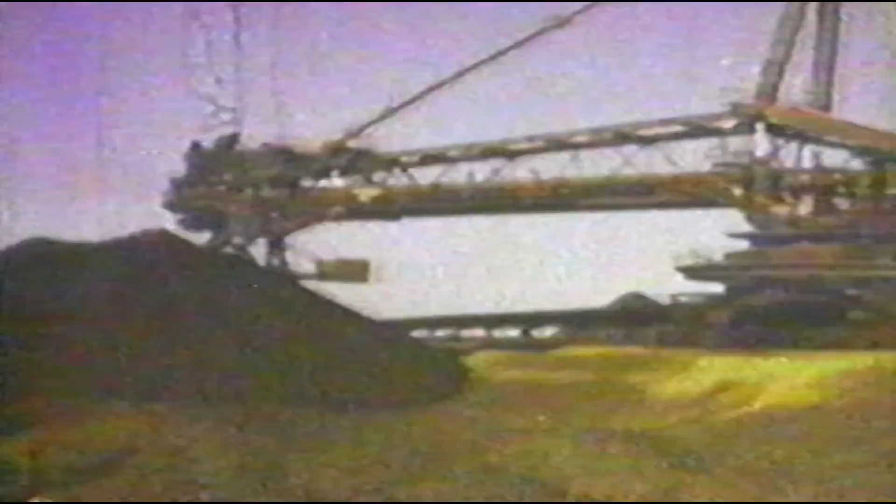Because of energy shortages, transportation and scheduling problems, the stockpiling of larger quantities of materials is needed. If you have a big job to do, this is the machine that can do it.

The Fairfield Engineering Company has a working agreement with MAN Corporation of New York and Nuremberg, Germany, to provide the best answer to the growing materials handling problem. In the next few minutes, we'd like to show you this machine and what it can do for you. It can do a better job of moving materials in large volume and with higher reliability than any other equipment on the market. And here's why.

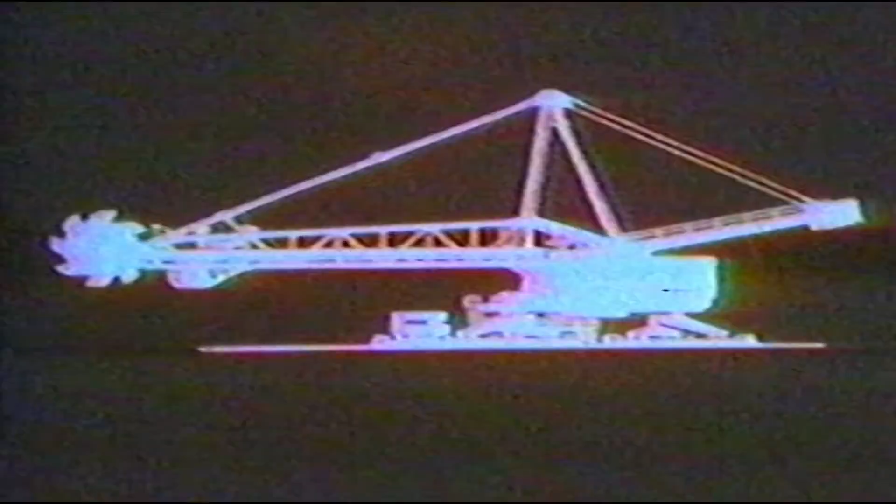It is built better from the ground up because it was designed with these three major design considerations in mind: lower wheel loading, higher machine efficiency, better bucket wheel design. We want to familiarize you with this machine to show you why these design considerations are so important.

The entire machine is supported by bogie wheel assemblies. The exact size and number of these wheels is determined by the load to be carried. Next, the equalizers have been built up to support the gantry. You can see one leg of the three legs of the structure here. This top view shows that the gantry forms the base for the slew bearing. This bearing allows the entire upper structure of the machine to rotate. The rotate platform is above the slew bearing and supports the main mast,

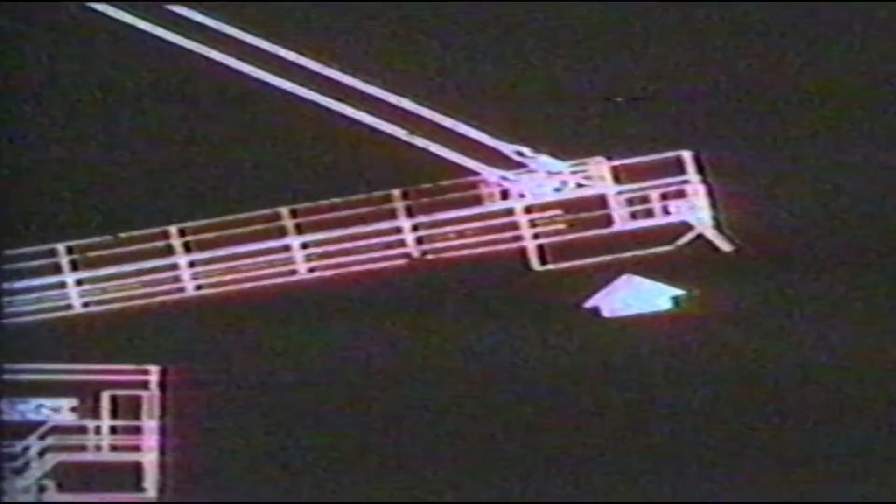tie rods, ballast boom, ballast box, stacker boom, operator's cab, and bucket wheel. The stacker boom houses the boom belt, leading from the bucket wheel to the central chute, which feeds the material to the impact table and onto the yard conveyor. These are the main structures of the machine.

Now that you've seen the parts, we want to show you how they go together and why they form a machine of superior quality. Let's begin again at the supporting wheels, the bogie wheel assemblies. The size of these assemblies is large enough to meet the load requirements of the machine, yet no single wheel has to support more than 48,000 pounds.

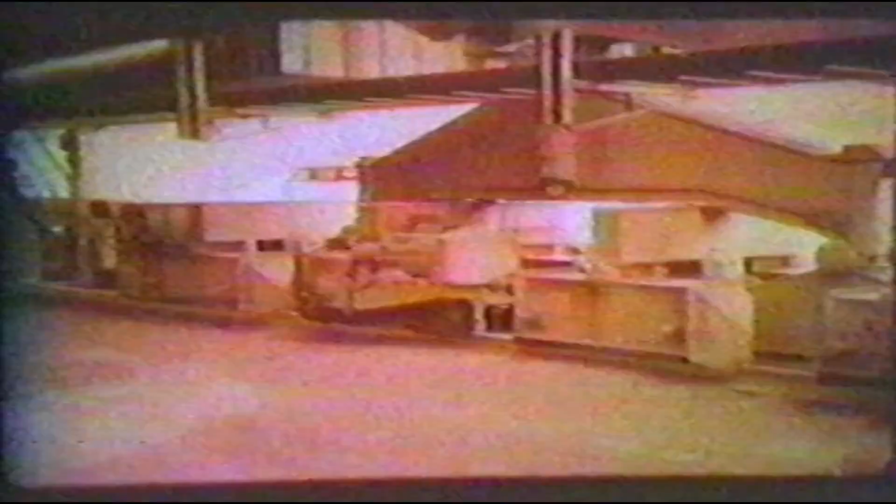This provides high reliability, and because the load is distributed carefully over several assemblies, the result is savings in reballasting costs. Between the bogie wheel assemblies are the motors and gear drives used to move the machine during a traversing action. Positive locking of these wheels in place on the rails is provided by rail clamps, which are spring-loaded for fail-safe action and are released hydraulically.

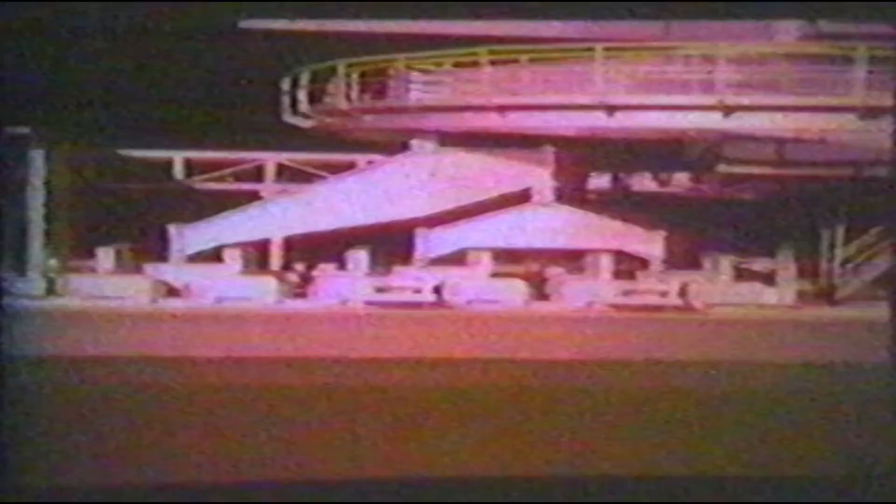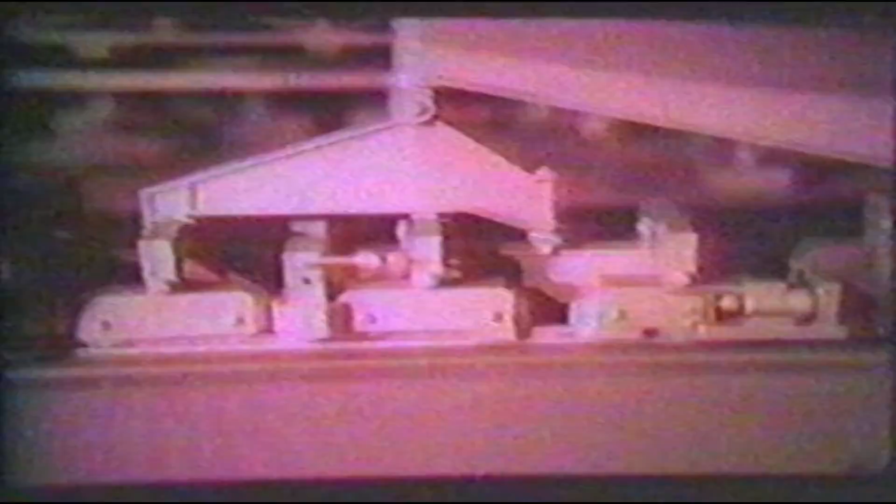The bogie wheel assemblies are connected to a series of equalizers, shown here on a scale model. You can see how the loads are safely distributed from the machine through the gantry and through several equalizers to the many bogie wheel assemblies. The number and size of the equalizers is dependent on the number of bogie assemblies required to carry the load.

These assemblies are equipped with jacking pads so that major downtime is avoided. Any single component can be easily removed and replaced, since the load on any one assembly does not exceed 48,000 pounds. These equalizers are of box beam girder construction, providing high strength and reliability.

Connections between moving parts are machined to give smooth fit, low wear, and ease of replacement. Here you can see the pin connection from the equalizers to the gantry. All joints are articulating to allow proper transfer of weight and automatic alignment for any changes in the machine or the rails due to temperature changes or settling of the ballast.

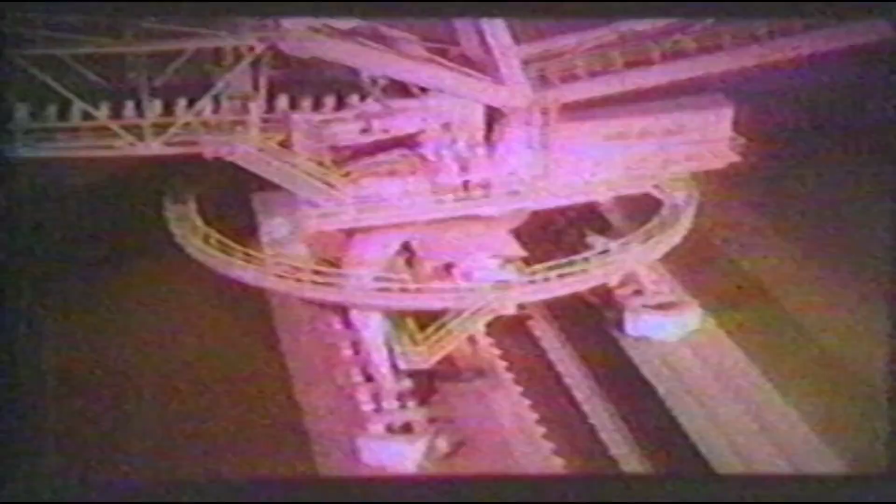On the dual leg side, the major articulating joints allow for changes in rail elevation. The weight is distributed across the three-legged gantry to the single leg side. The equalizing system on the single leg side has a self-limiting ball joint that allows the machine to adjust for any variance in the distance separating the rails and accommodates force variation in the structure in all directions.

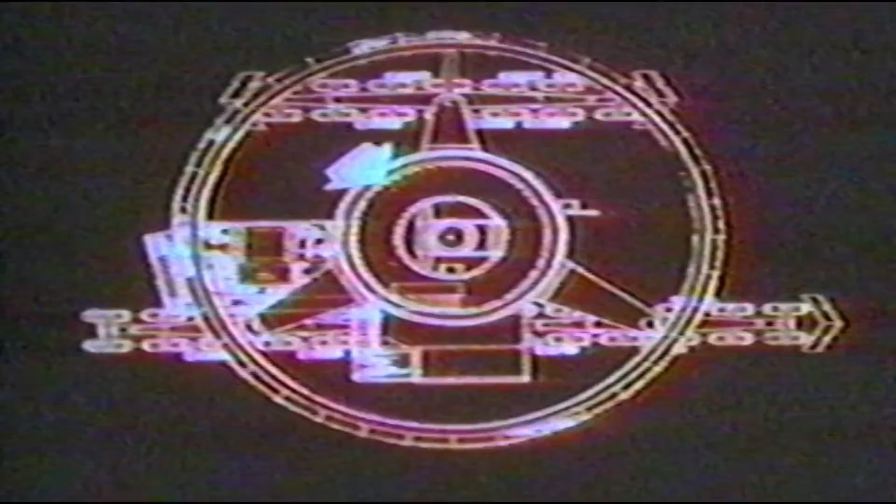All of these equalizing systems support the three-legged gantry or base plate upon which the entire weight of the machine rests. The gantry also houses the slew bearing, the largest bearing in the machine, the one that gives the machine the ability to rotate. The bearing is a triple race roller bearing with labyrinth seals.

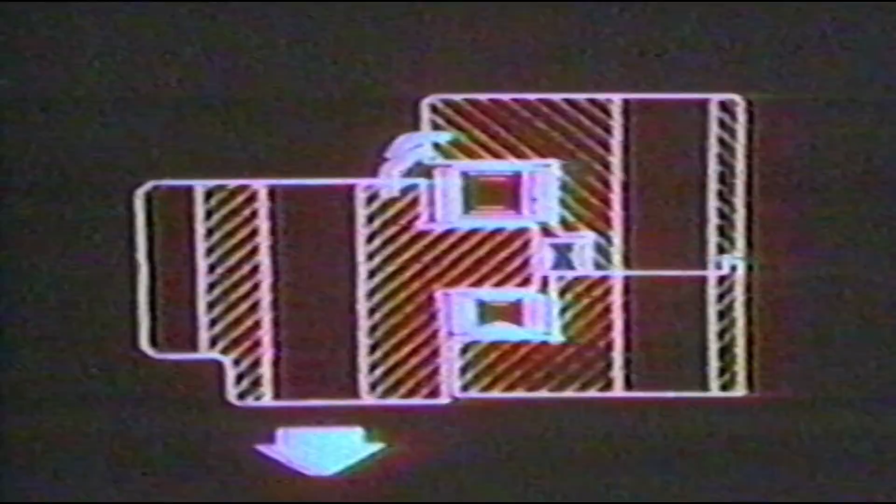The bearing has inspection plates that can be removed to inspect for wear and allow planning for any replacement months ahead of time. The slew bearing is held in proper orientation to the gantry by means of high tensile bolts passing through it. The slew bearing is also connected to the rotate platform by high torque bolts.

The surfaces of the gantry, the slew bearing, and the rotate platform are all machined for precision mounting of these components without the need for fillers. This proper machining allows the working loads imparted by the upper structure and rotate platform to be transferred through the slew bearing to the gantry. The slew bearing is designed to permit a 250% temporary overload.

Here is one of the striking design features. The slewing gear teeth that are driven to rotate the machine are not part of the slew bearing. In fact, they're not part of a gear at all.

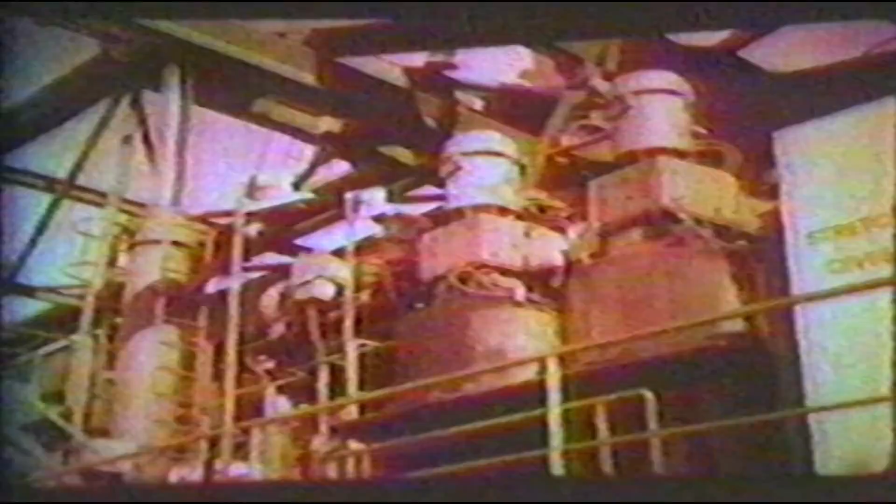This machine uses pin teeth, and you can appreciate pin replacement over bull gear replacement in a machine of this size. The slew drives are eccentrically pin mounted to the gantry and are reached by walkways on the maintenance platform. This eccentric pin mounting allows the backlash of the machine to be adjusted to practically zero by only one man. Also, the machine is designed to operate on half the number of drives available.

The rotate platform provides mounting points for all of the other components and transfers the loads to the slew bearing, and supports auxiliary equipment such as hydraulic control rooms and boom conveyor drives. It is at the proper height to perfectly balance the dead weight of the stacker boom and bucket wheel with the ballast boom and ballast box.

Regardless of the size of the machine, when it is in a static condition, the machine is in near perfect balance. The lower section of the main mast accommodates the pin connections for the stacker boom and ballast boom and the hydraulic luffing cylinders. The top is machined to accommodate tie rods for stacker boom and ballast boom.

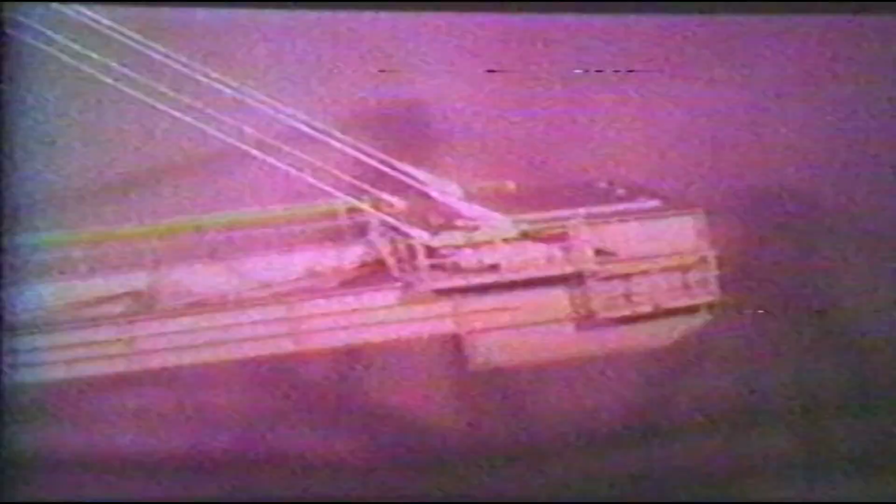The tie rods are made of specially selected steel plates, which are X-ray and sonically tested. The ballast boom and box are structural steel members to accommodate the concrete counterweight, permitting the machine to be properly balanced. The tie rod to the stacker boom is pin connected.

Opposite the ballast boom and box is the stacker boom, designed to hold the reversing boom belt conveyor as well as the bucket wheel reclaimer. The stacker boom is of truss-type construction.

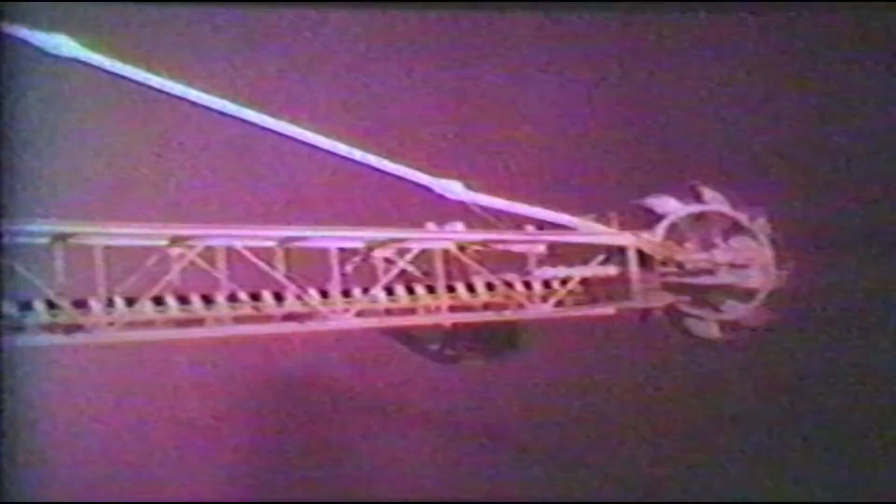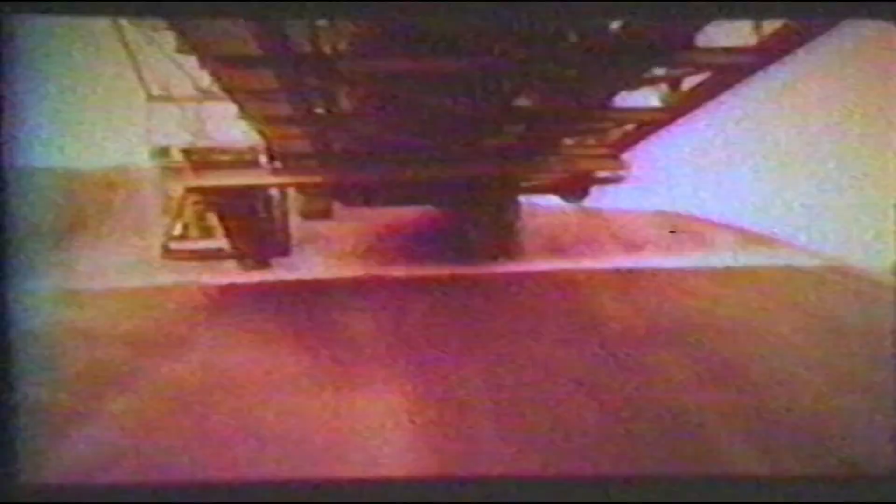The operator's cab can be raised and lowered to give the best view under all operating conditions. Here, the cab is up to clear the roadway, while the bucket wheel is brought close to the road. It can be kept low to observe bucket loading, or raised to observe discharge. All the controls for traverse, slewing, and luffing actions are contained in the operator's cab.

Here's a view from the cab.

Bucket wheels are available in two basic types, cell types and cell-less types. The cell-less type has buckets mounted on the outer surface of the wheel. The backs are closed off by a fixed plate against which material presses until it reaches an opening at the top of the wheel. The material falls from this opening through a loading chute into the load skirts.

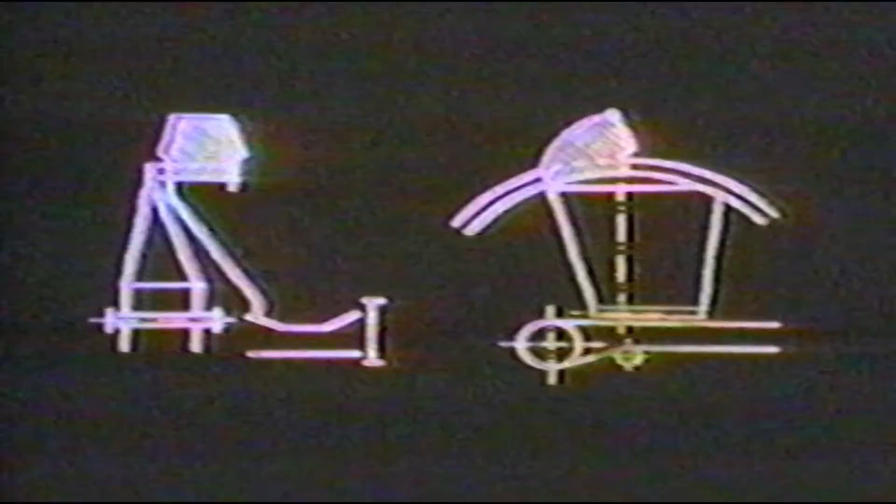The cell type has buckets mounted on the outer surface of the rotating wheel, but the backs are open to discharge across the face of a cone. The cell type is preferred because it takes less energy to operate, and the material flows toward the discharge the instant it comes in contact with the bucket. It has excellent discharge, and there is less wear because of its design.

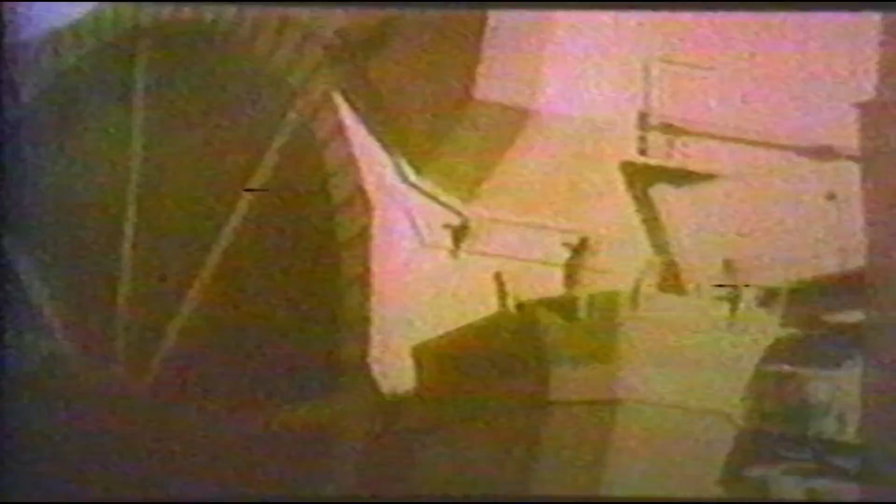The buckets can be disconnected by removing two pins and one wedge lock. The boom belt transfers the material from the bucket wheel to the central chute.

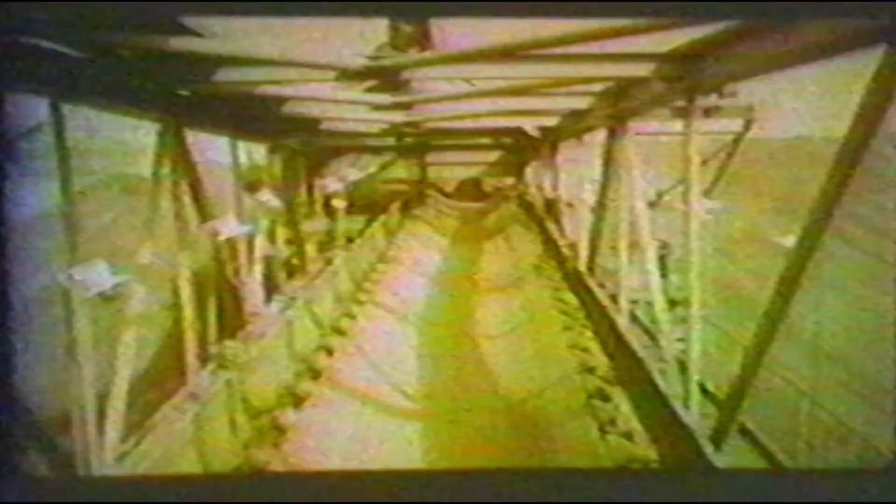This belt has retractable load skirts on both ends to accommodate stacking or reclaiming. This same belt can handle any tonnage from 10,000 tons an hour in the reclaiming mode up to 14,000 tons per hour in the stacking mode. And although the machine has two conveyor drives, again, it can be run with one.

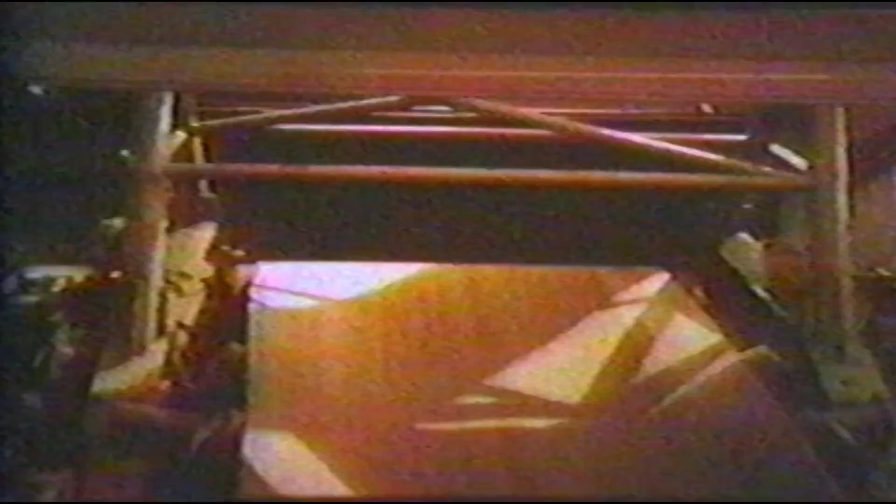The central chute receives material from the boom belt conveyor and directs it to the impact table. The chute is lined with impact plates to reduce maintenance costs. The impact table, consisting of a structural frame and closely spaced heavy-duty impact idlers, receives material from the central chute and loads it onto the yard belt conveyor.

Let's see the MAN machine in action. The machine you're watching is a reclaimer. At this particular installation in Canada, there's another reclaimer, a pair of stackers, and other equipment to meet the entire material handling requirements.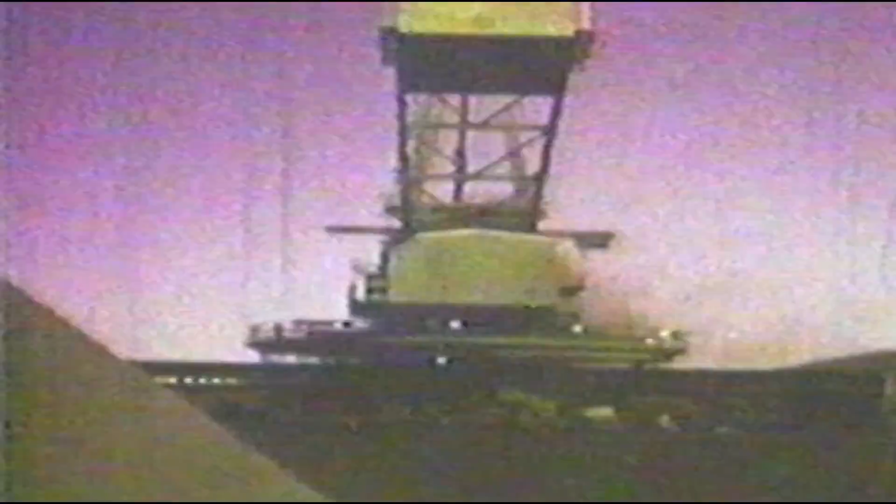Here, the loading of the buckets is exactly right for the material being handled. You can see clearly the action of the material within the storage pile after each bucket has made its cut.

This particular machine was designed for an operating efficiency of 75%. It has actually achieved an operating efficiency of 95% through a planned maintenance program of 8 hours once a week, and kept that record through the first 4 years it was in use.

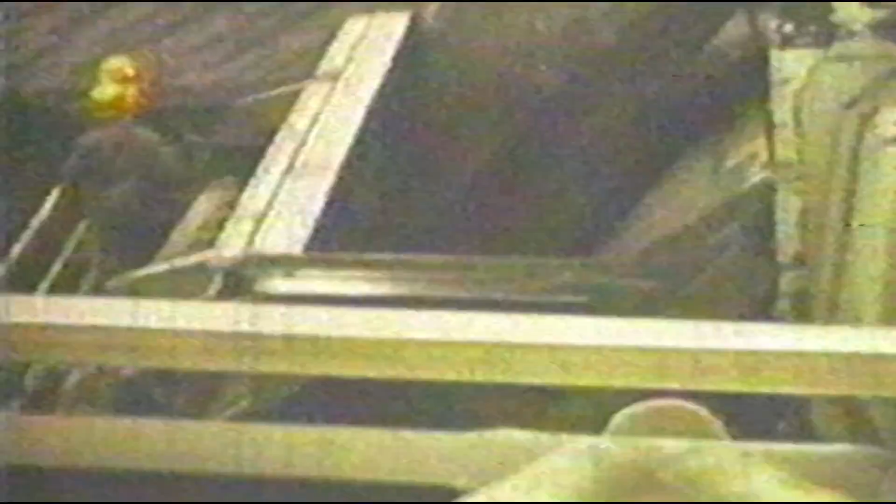So, if you have a big job to do, keep in mind that the bucket wheel stacker reclaimer from Fairfield Engineering and MAN is years ahead of its time in design and efficiency, but available now to meet your individual needs.